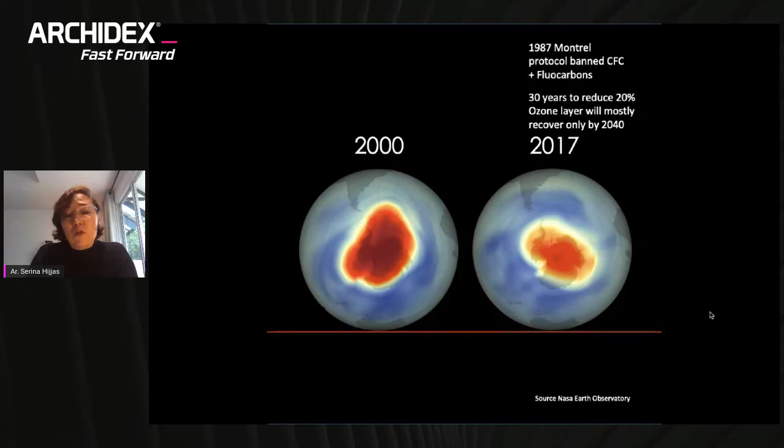I bring this up because whatever actions we take now will not be immediate—it will take years before we can reverse what's happening to climate change and the planet. We are already approaching the 1.5 degree limit, and we'll see repercussions through coastal flooding, urban heat islands, and effects across the planet, including biodiversity depletion, which is already happening. I picked up a book called 'What the F*** is Happening to the Planet,' telling you what's changing, and that really affects how I see we build, create, and innovate moving forward.

I came from a background of architecture, and the buildings done by Hijjas before were predominantly bold, still, iconic, with a strong identity—a lot of black and white. My first job when I returned from studies in the UK was one of my first projects, worked on in collaboration within the office. A lot of our work is really developed collaboratively—while we lead the ideas and direction, the best work comes through collaborative thinking. This was one of my first projects, the Menara Telekom.

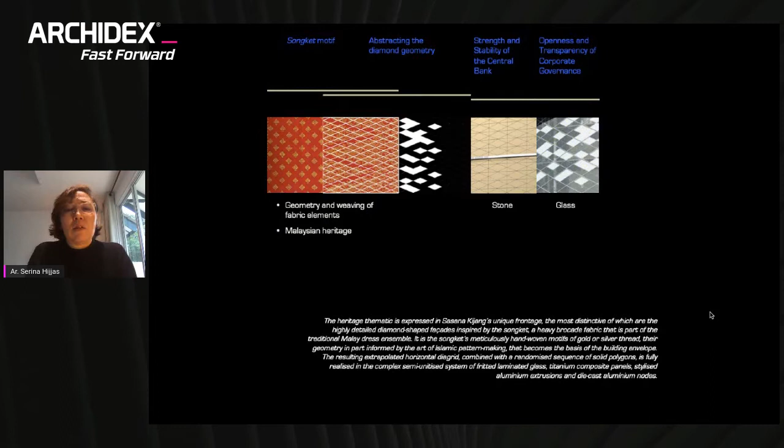The second idea and element inside this building was derived from the heritage of the kain songket, but the songket's geometry and weaving of the fabric was then abstracted into pixelation and diamond geometry, wrapped around the whole building in a series of stone, glass, and even titanium. It's the only building in Malaysia that has titanium on it, on the museum side.

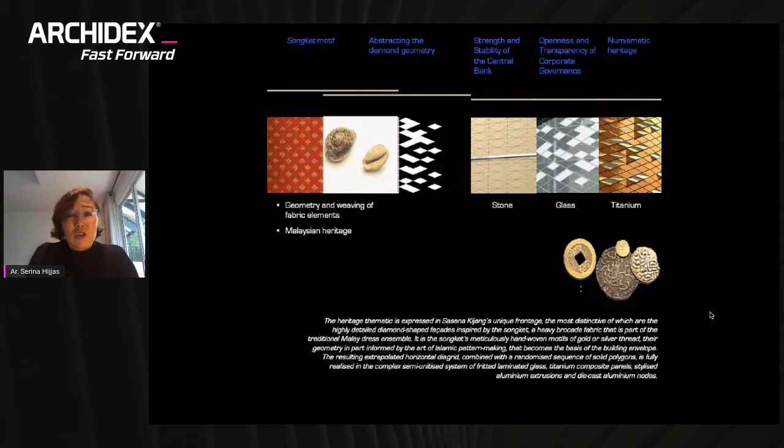This was one of the most complex buildings we have ever built. Not many people know that there's 2 million square feet of built-up building in this building. It's almost two-thirds the height of the Petronas Towers, but done horizontally. It has more than 1,000 car parks submerged underneath the building.

What we wanted to give was a sense of lightness and pavilion. The front buildings are three series of pavilions - Pusaka, Seni, and Pustaka - named because of the function of the buildings inside.

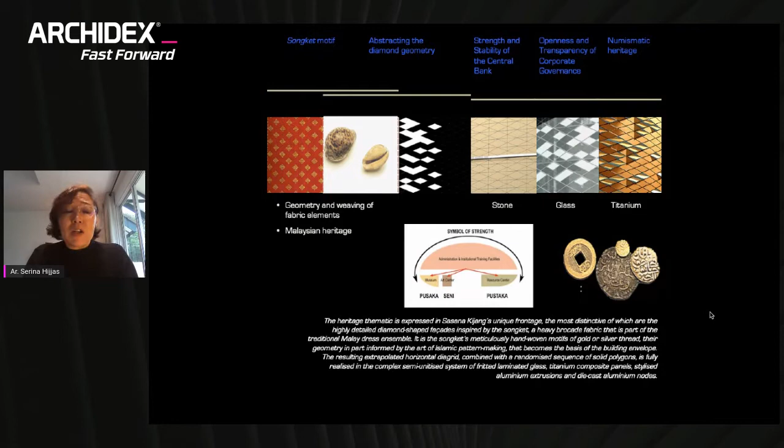This is a view of the building. I've got to say that when I said it was the most complex building, it looks rather simple. But right at the beginning, we looked at the environmental aspects of it and how we brought the daylight into the atrium spaces.

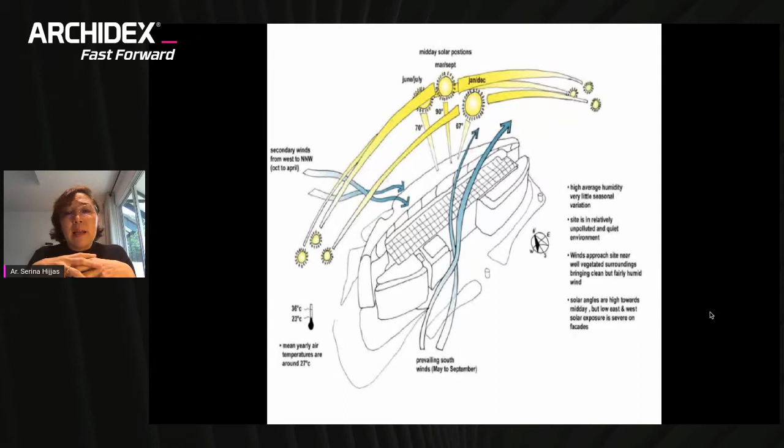We responded to north-south orientation - the building is predominantly north-south, and heat gain is mostly in the east and west. How we wanted to bring light in was also very important.

At the human scale, it wanted to appear very low-rise and approachable. The building, whilst it has different components, responds by wrapping a building fabric that is contiguous around, but the details are quite different.

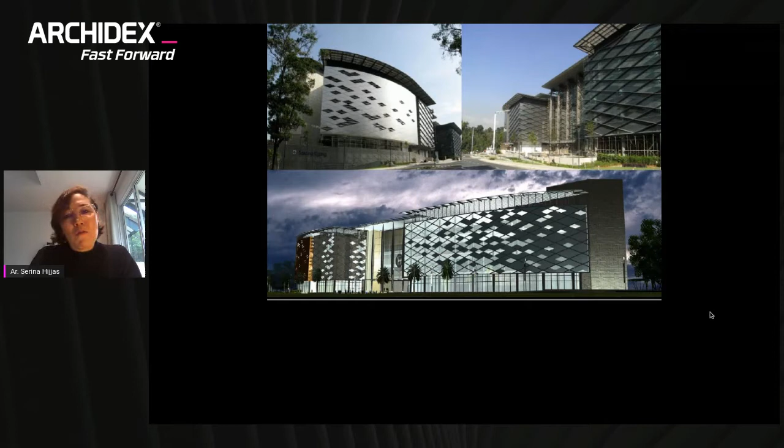There were more than 22 types of facades on this building. As I said, it was one of the most complex buildings that we had done.

From the eyelids - whenever we do a design, I don't know if it's the same for yourselves, but whatever research you do influences the work you do later on. So this diamond facade that you see here appears again in the tower of 4G11 in Putrajaya, and appears again as eyelids on the building.

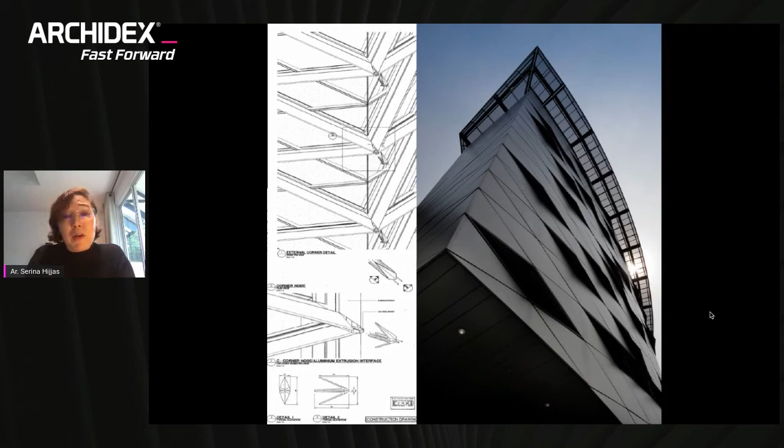The songket also appears in the boulevard of Putrajaya, which was also done by us - this 3-kilometer landscape planning of the boulevard with a matrix of diamond grids going down was also developed from that. It was something we were very fascinated about, and we adopted it into the building, creating something unique but responsive in the facade.

A lot of the times when we start a competition or an idea, we look at it in a very holistic way, and we also work with engineers together - both the MEP and structure simultaneously. We work in a more collaborative way to get the best out of them, and also generate ideas with them.

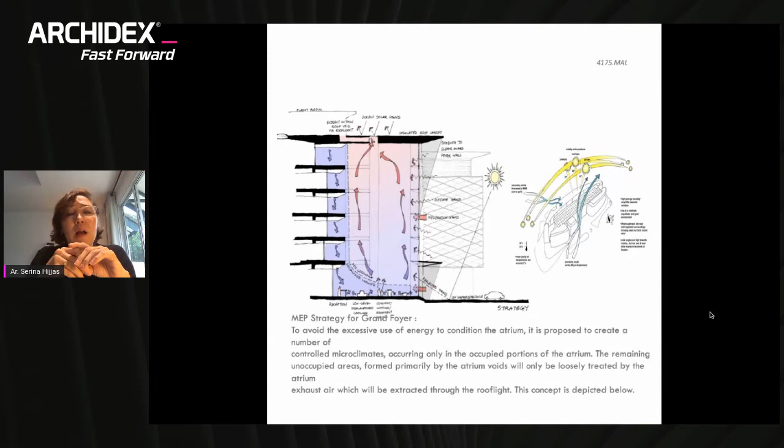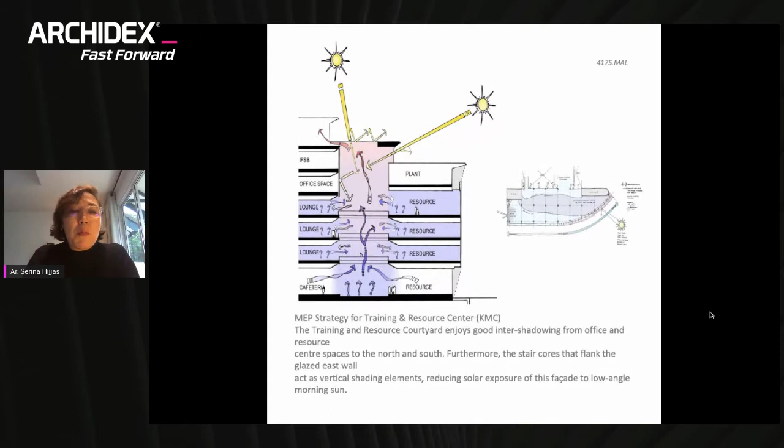So you can see the way the air system works inside this building. As I was mentioning, from the outside you don't understand the layering and the complexity of the building, but there is a whole series of ideas that are generated inside the building.

One of them, of course, was this continuous Nautilus staircase which spirals up the building. It actually starts—we wanted something dynamic, so as you're at the base of the building and you're looking up, the experience of going into the museum, probably comes from a memory of going to the IM Pei building at the Louvre, where there's a huge spiral staircase.

That brings you from ground to lower ground. But in this case, it's a continuous opening up of a spiral that goes up to the top. So it is not a constant spiral—it is a Nautilus staircase, which actually gets bigger and bigger as it goes up to the top.

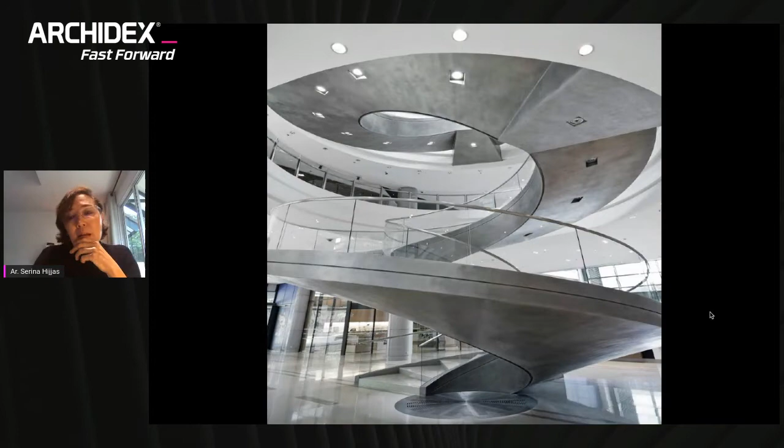So complex as it is, it looks continuous because we use pewter render onto the building, which is basically special, because we wanted it to be Malaysian. That's why you see we've actually used pewter for the first time in this spiral staircase going up.

Another interesting building for us, evoking ideas of portability, was the Malaysian Pavilion. It was the first time that the Malaysian Pavilion at Expo did not represent a Minangkabau roof. So it was a shift, an idea that broke the normal rule, because in all the other expos that Malaysia was represented, it was always this cultural building that looked like a Minangkabau. In this case, we actually explored something completely different.

We wanted to take something that would inspire from nature, and the idea of the portable house. When I was studying at university, the idea of portability is nothing new in the Asian context. A house can be completely built in timber.

For example, we have one house, a 100-year-old house at Serina Hijjas' house in Rimbun Dahan, where the house was built in Perak, then disassembled and moved and reassembled exactly, and it now stands as a 100-year-old house. So portability—we were introducing that idea.

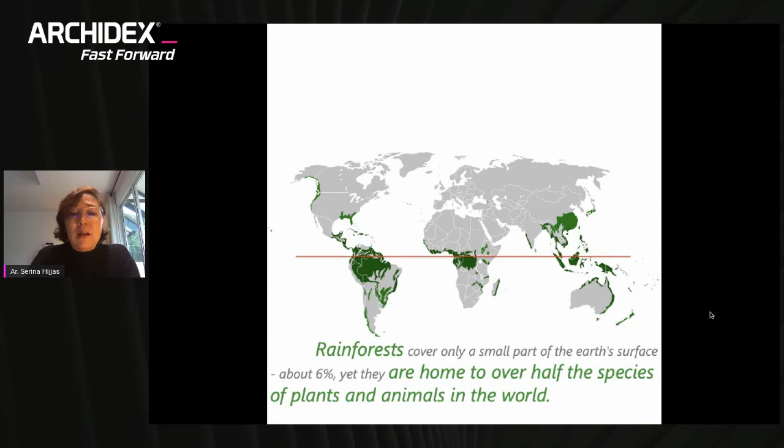So the idea here for the pavilion was the seeds from the rainforest as a metaphor, and they were built using timber. The idea behind this was to exemplify the biodiversity and the uniqueness of Malaysia's biodiversity to the world, both for medicinal value at the humanity level and at the biodiversity level.

So from the humble rainforest seeds, we took this inspiration and translated it into a pavilion, and it's supposed to be an experience, quite different from normal buildings. But at the same time, we looked at the whole sustainability component, from ground source cooling to water collection to the skin of the fabric of the building.

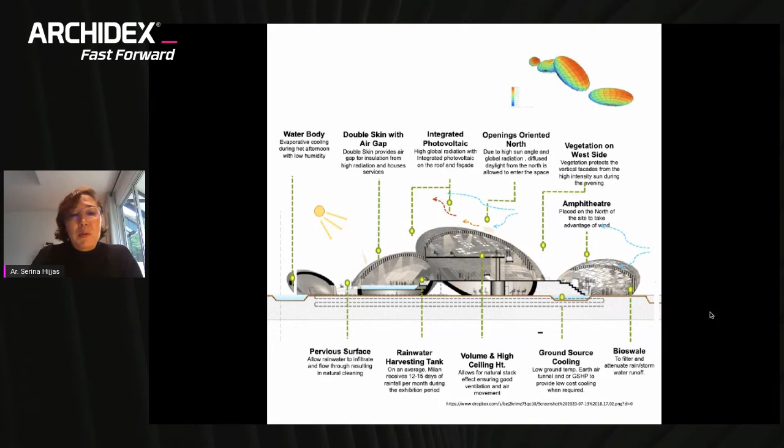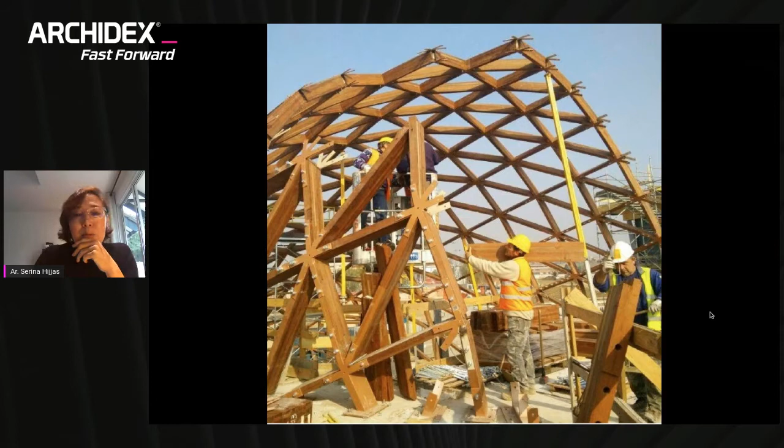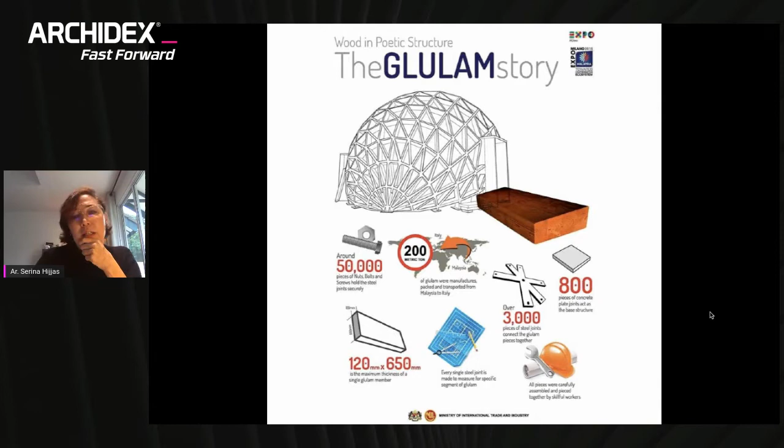It was a very interesting experience, because all of these timbers were manufactured in Johor and then assembled by Italians in Italy. It makes for a very interesting glulam story in terms of building. So I think this was our exploration of trying to showcase the best of Malaysia, both in terms of the richness of their diversity and in terms of the materiality.

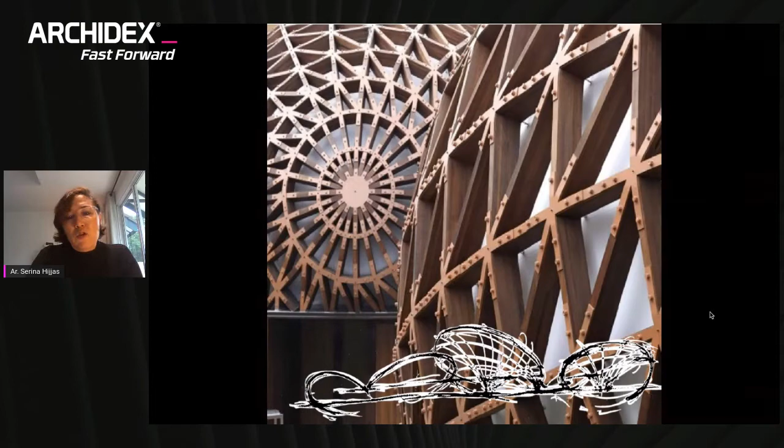And it was one of the best pavilions at Expo. It really became an inspiration to Malaysia itself, that we can show that even though we're a small country, we certainly have a lot of interesting ideas.

Both these pavilions are actually competitions, so we were very fortunate to enter into the second pavilion, the Malaysian pavilion. Pavilions are very interesting for us, because museums and pavilions are the only typologies of buildings that allow you to express something unique. You're not going to get that necessarily with housing or definitely office buildings—there are different types of responses that you would need to take.

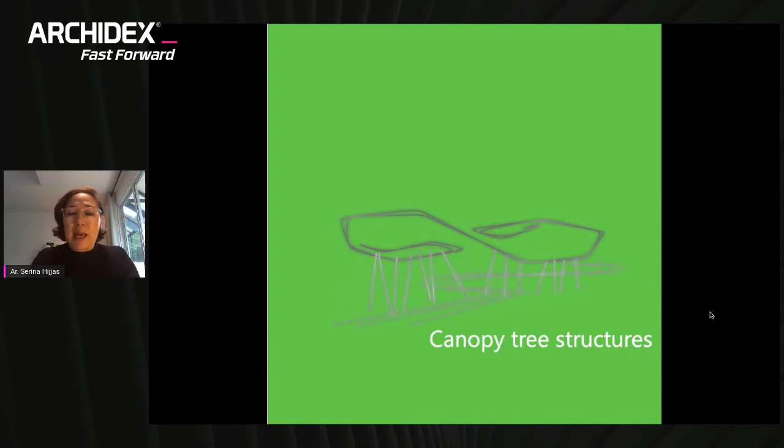In the pavilion for Expo 2020—it's still going to be called Expo 2020, but it's going to be held next year instead because of the global pandemic—we came with a totally different idea in the competition. All that you see here was actually our competition submission right at the beginning, very, very comprehensive, but again, trying to do something that was unique.

In this, we call it In the Canopy of Trees, the concept of creating canopies, tree structures as a Malaysian pavilion.

I remember when I went to Italy and they said, 'Oh, where are you from?' And I said, 'We're from Malaysia.' And they said, 'Oh yeah, we've seen the cartoon animation Sandokan. People live in trees, above the ground on stilts and all the rest.' I said I don't know this animation. It turns out it's an Italian animation about the Malaysian jungle and way of life. So it was very ironic.

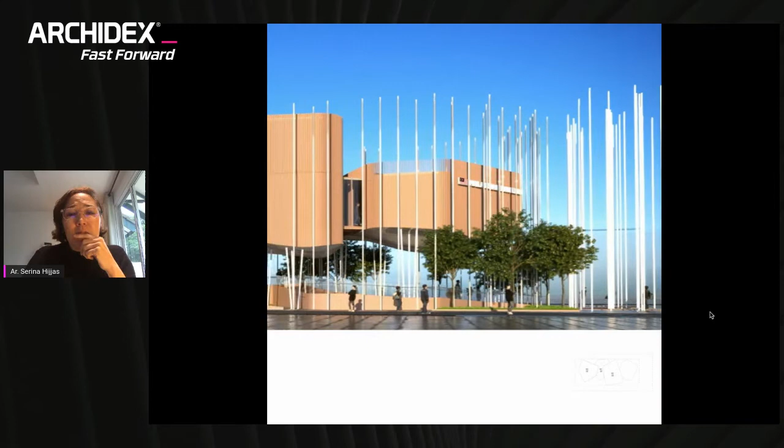That stayed in my mind, that people's perception that we live on stilts. And it's interesting because as we go forward, in the event of climate change, for those living by the water's edge, living on stilts may become the new norm, and we will be reverting back to that. So in this pavilion, the Malaysian building on stilts made of natural materials was one of our inspirations. The experience of meandering through the landscape, unique to Malaysia in terms of our rivers, was an idea that seemed to resonate.

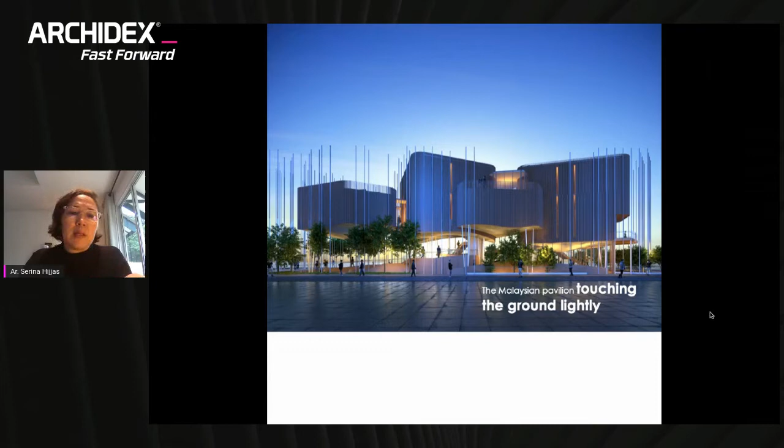And this is the Malaysian Pavilion for Expo 2020. The building is clad and built in steel and timber for sustainability. This will be the first carbon neutral pavilion at Expo, as much as we could do. The idea of the building is touching the ground lightly, so the experience of the groundscape is as important as the experience of the pavilion itself.

We developed this idea because we were getting a lot of criticism globally about palm oil and deforestation. Not many people know that Malaysia does a lot of reforestation and sustainable palm oil. We wanted to showcase that in some form, making a political statement as much as a pavilion statement. So it's an integration—a lot of pavilions are just about an experience inside.

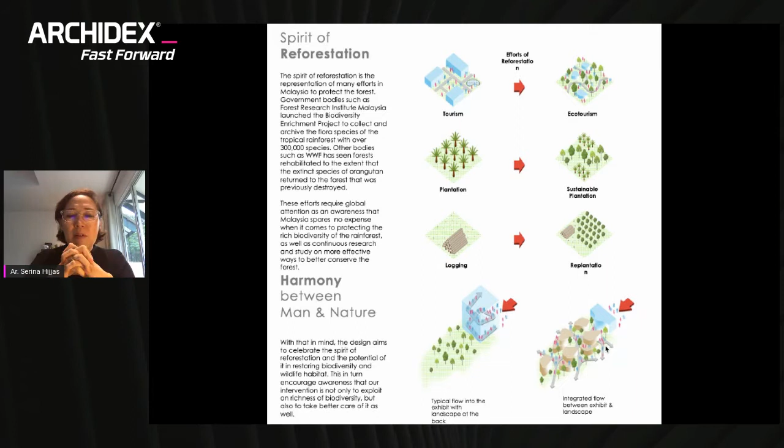Quite interesting, because the Singapore Pavilion, which is obviously going to be our competitor in the tropical belt, is actually lifting off the ground too, but theirs is a single platform pavilion, and the experience of walking up through there is also an experience, and inside it's actually quite green.

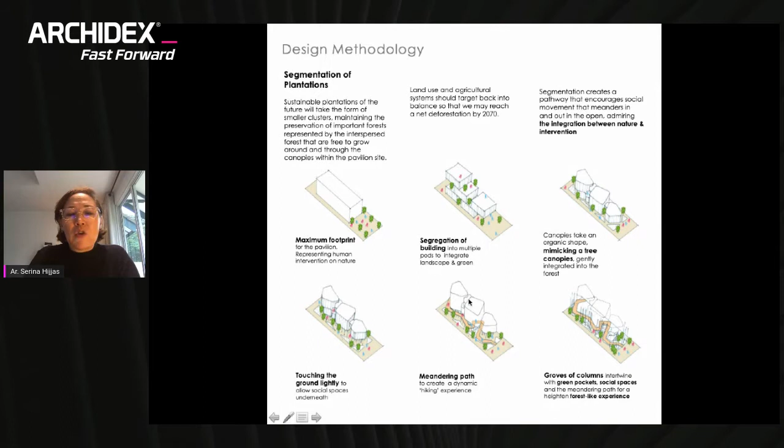So this was some of the design methodology—looking at do we maximize the building on the land, do we stack it up differently, do we mimic the tree canopies, and how do we get the experience of meandering up the building as part of the whole experience of the pavilion? This is a section through the pavilion showing the exhibition itself is above ground.

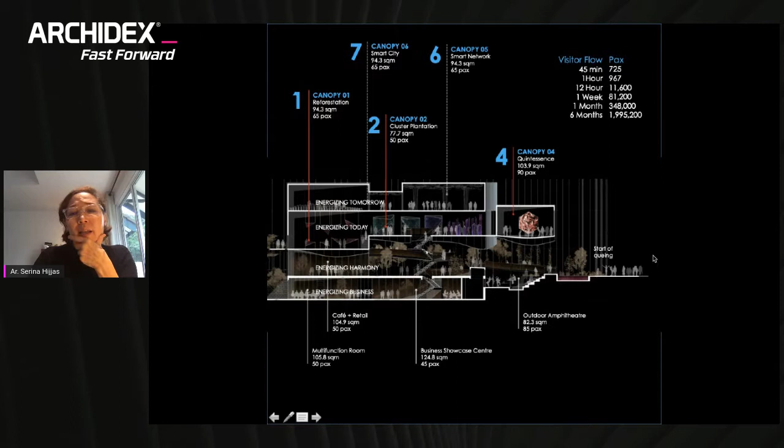But part of the below ground is also an outdoor experience—eating areas, and then the queuing experience and walking up the ramp is part of the entire experience. And then when you come in, what will that experience be?

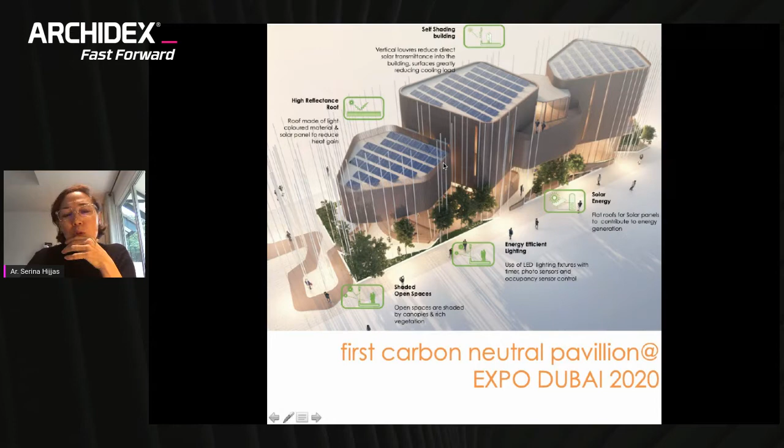As mentioned, it is going to be the first carbon neutral pavilion. We obviously maximize as much as possible on the solar panels, but that only generates about 20% of the energy. So part of doing the first carbon neutral pavilion is that we are going to be growing and reforesting trees in Malaysia as part of the carbon exchange we do, because we're limited on the amount of space we can build. We've maxed out on energy efficiency and solar, and we also have heli fans to scoop air into the place. We've done as much as we could to optimize the building.

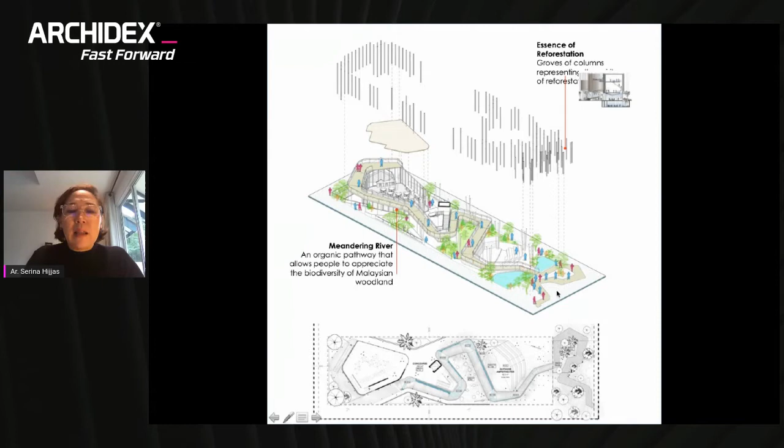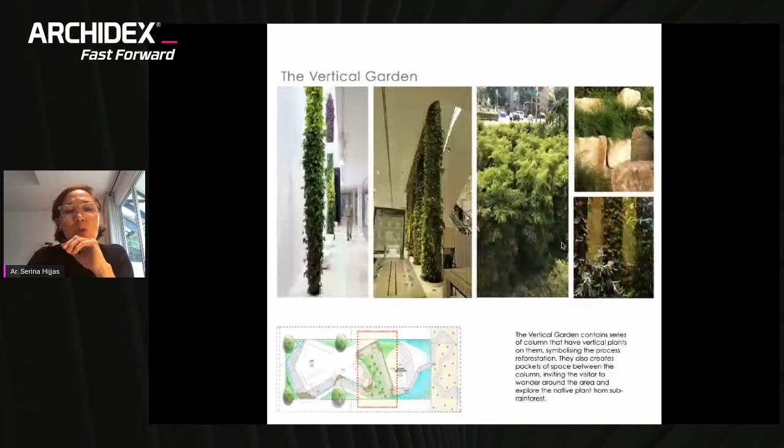This is the experience of people, how they ramp up from the white box experience of the pavilion into the black box experience. And the columns you see around the building—we've also introduced a water rill, so it's the sound of water running down the ramp into a water pool, with a series of vertical greens and courtyard greens to bring light down below.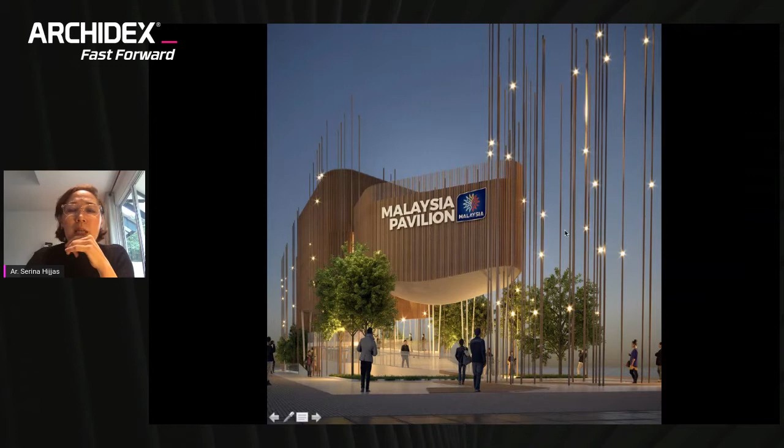So the poles that you see here will actually move a little bit because they rise quite tall, and the lights on it are actually a representation of the fireflies—just a symbolic representation within the pavilion landscape itself.

Not many people realize that daylight is free energy. It's something we enjoy in the tropical belt because we get 360 days of 12 hours of sunshine every day apart from rain. This is quite different if you're living in London or New York, where daylight hours change between 7 to 3 and so on. So we're in a unique place in how to optimize on that, while also realizing what other ideas exist. This building about free energy is the new Celcom Tower.

I don't know if you remember, some of these buildings used to have a Celcom building, the old Celcom building used to say 'Welcome to Celcom territory.' They used Usain Bolt as one of their ads in terms of speed of connectivity, providing speed of connectivity to people. So Usain Bolt's ad came after the building. I've just got to say this.

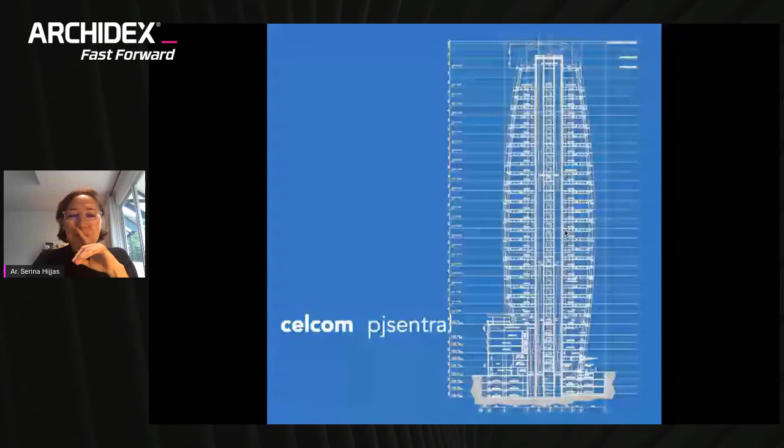This did not inspire the form of the building, but in fact the building is a curved building going up. It's at PJ Sentral. When we developed this building, now some buildings take a long time to complete - Telekom Malaysia, Bank Negara, and this building - they have all taken something like 7 years to complete from start to beginning. So guys, we're in this for the long haul, not for the short haul.

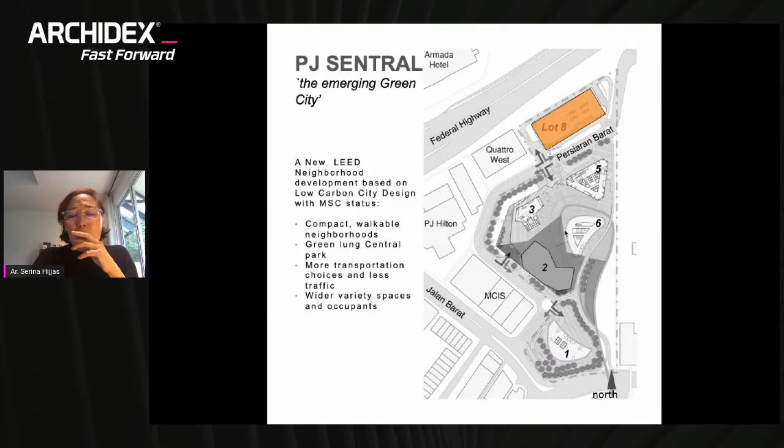But when we were developing the idea for Celcom Tower, this was before the co-working space came in, and we were looking at distributed work options, teleworkers, satellites, move to mobility, change use, where basically they don't work at their desk. So it was an emerging idea, but this is fully taken into this building.

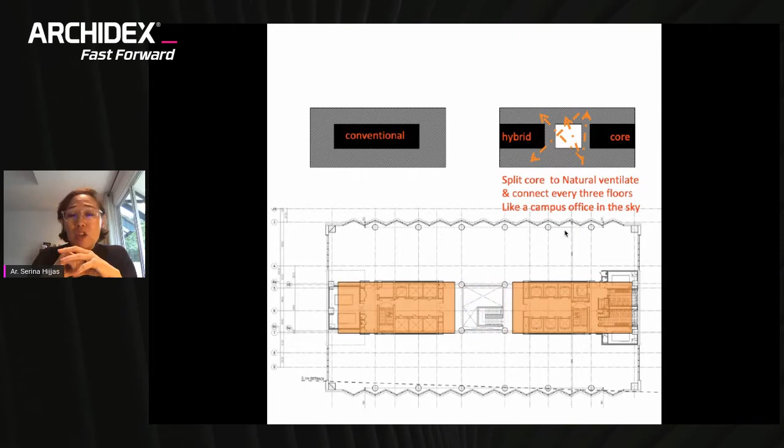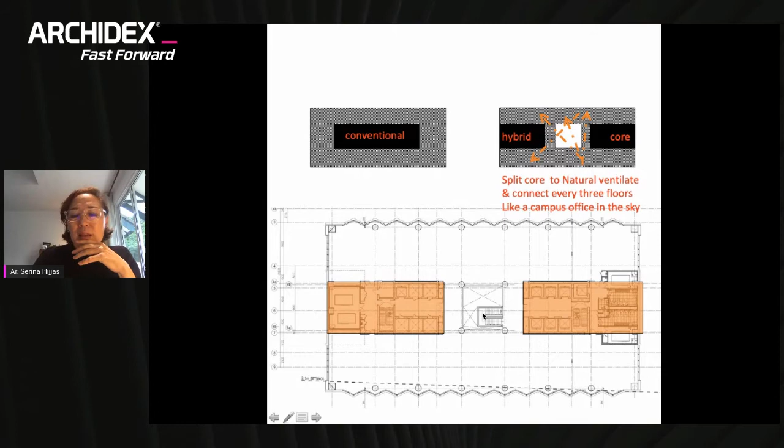The uniqueness of this building is, instead of getting a central core conventionally, we moved the cores to the side. That allows us to ventilate the toilets going up naturally instead of mechanically. It also allowed us, and that was the main idea of the building, to connect the building every 3 floors internally by a mini atria space. So it's, I would say, a kind of hybrid type of core, which was the first.

And originally, the building had all these cross braces going up the building. But as a process of designing the building and working with the developer, some of these things get value-engineered out.

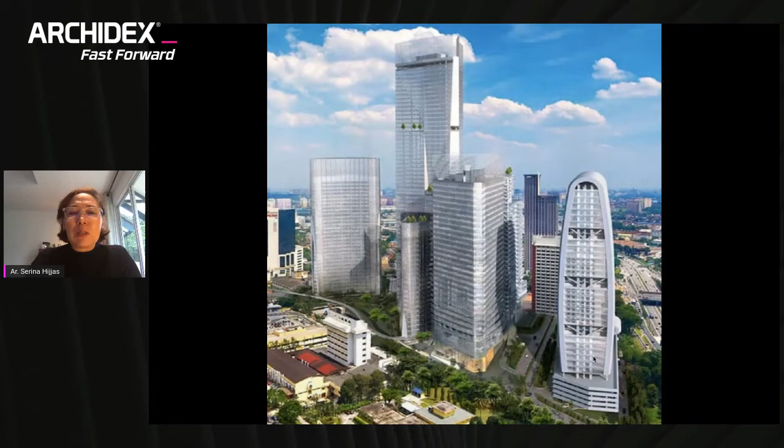And this is the building itself. So whilst it looks like a totally clad glass building, in fact, on the northeast and southwest sides, where you get a lot of heat gain, it's actually predominantly solid where the cores are. So it works in terms of the passive orientation.

When dealing with daylight as a free energy, you have to be careful about glare. In the Malaysian context, we get a lot of glare. So the learning experience here is that when we were designing the building facade, I basically said to the facade engineer that worked with us, when we touch the glass, I don't want to feel the heat of the glass. I want to be able to touch the glass and not feel it's so hot that I can't touch it. So that was one of the ideas for the building.

This is the look of the building. Obviously, Celcom territory, wanted these LEDs at the side so that they could actually do their advertising.

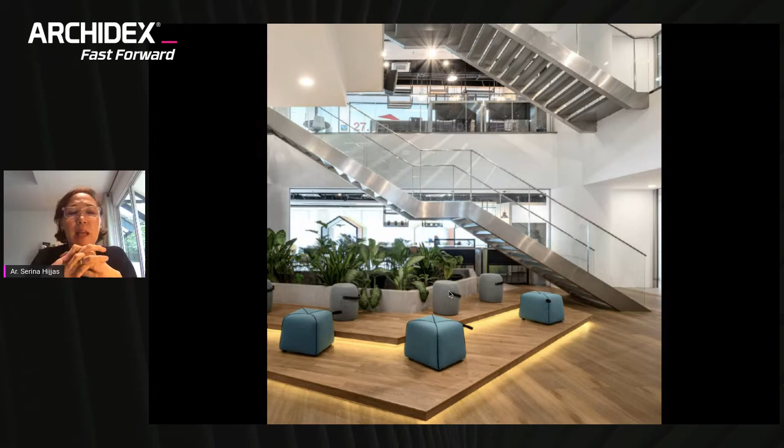This is the 3-story atria spaces that connects between the office spaces. And it is completely table-free in the sense that people can move and work wherever in this space. There is not a fixed desk situation in this building. So it's definitely adopted a very new way of working.

So I'm showing you the section because it's how it's connecting internally as an office building rather than just connected by lifts. It's connected by staircases, so departments can move in and out from one space to the other.

A little bit of a detail - this building performs at half the energy of a typical building, even though it is a glass building.

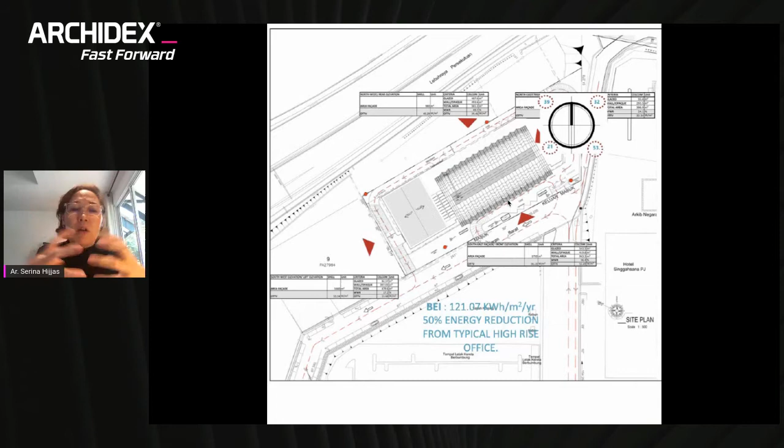And in terms of OTTVs, it's very, very interesting to look at because this is the north and the south. On the southeast, not all facades get the same amount of heat into the space. The OTTV for the glass on this side is actually 53. On this side, which is all glass, is 39. On this side is 32 and 23. So on the sides that are more solid, we're getting a better performance on the OTTV. But you can see that even though it's glass, depending on orientation - and that's why the idea of, if possible, passive orientation of the longitudinal facades to the north and south - will make your building perform a lot better.

This is the building view.

Creating spaces for people horizontally and vertical living has been an idea that we have been studying for some time. How can we change the mindset that we need to live vertically only for low-cost housing to get the density that we need? And how can we create more community livable spaces moving forward and future-proof us?

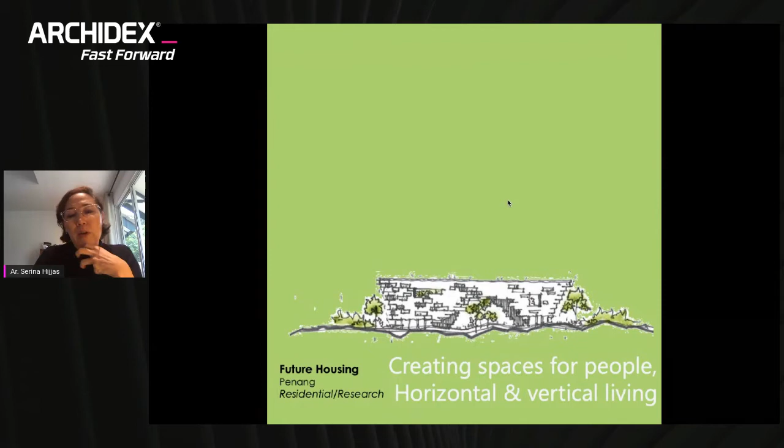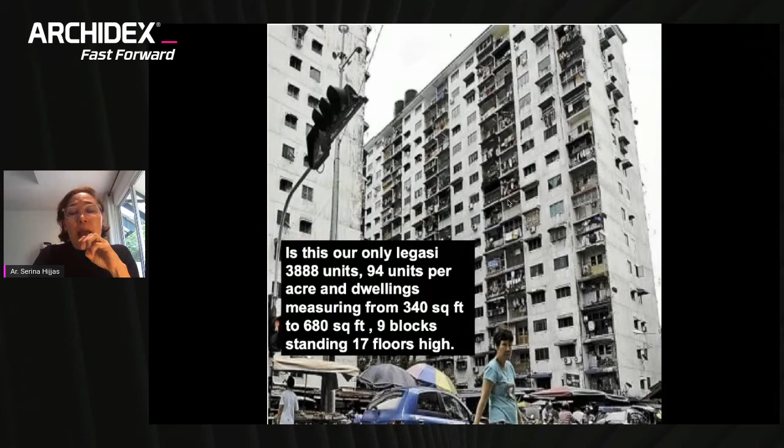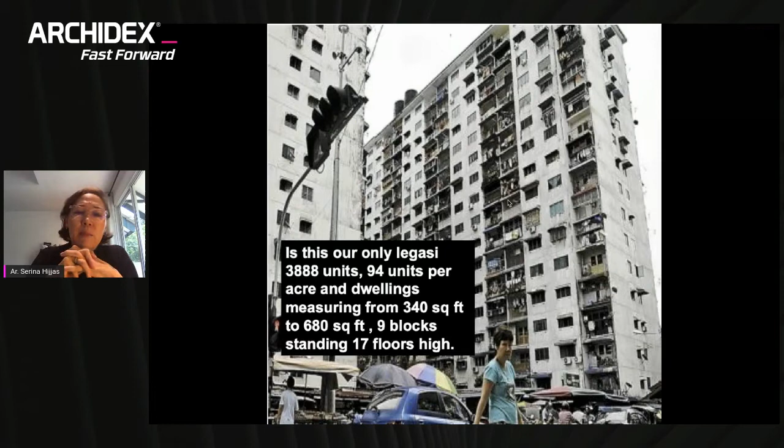And so this is the legacy that we have moving forward. In fact, if you go on the MRT road around Kuala Lumpur, you see a whole series of these huge developed high-rises. And I feel that high-rise for low-cost or medium-cost living isn't the best way forward because they don't have the space and they are not connected to the ground.

But in the time when the Rifle Range towers were going up in Penang, and we used to have the same here called Pekeliling, the normal dwellings were very, very small. We would have something like 3,888 units over 17 floors. And we just have to ask ourselves, is this the future that we want? Or is there more humane livable densification for our cities?

So we made the study for the competition, which I'm sure a lot of you entered, but we didn't enter. We lost time working, doing other jobs, so we did not enter, but we did exhibit this idea.

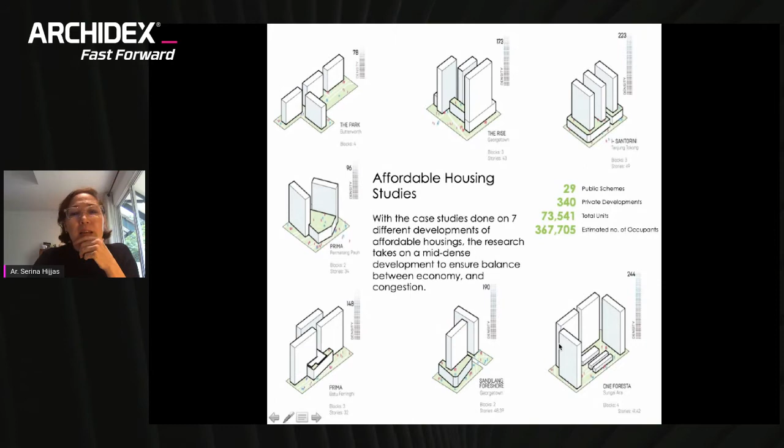And we went around Penang and had a look at the densifications that have moved from 78 units per acre up to 244 units per acre. So in just the last 15 years, we have moved from this to this.

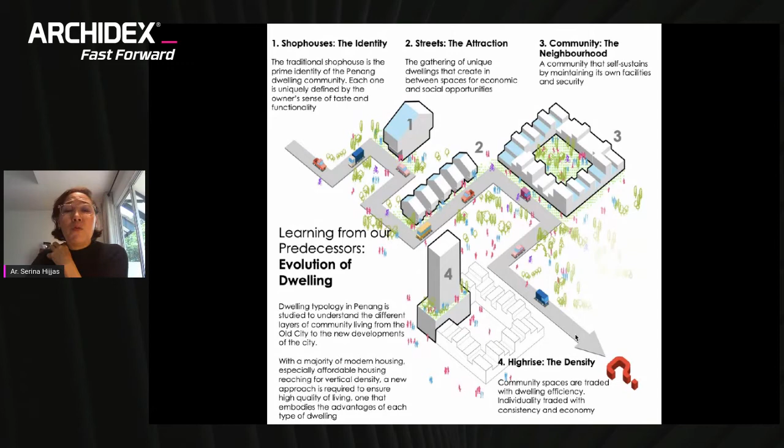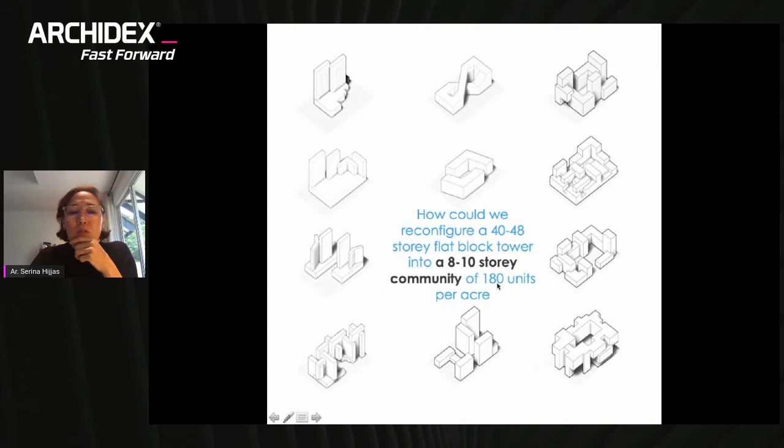And we really wanted to get to an idea of how we can actually move down to a much more neighborhood-level densification. So we explored the idea of 8 to 10-story communities, or 180 units per acre, which is fairly high, but not as high as the 244. And these were our various studies of that.

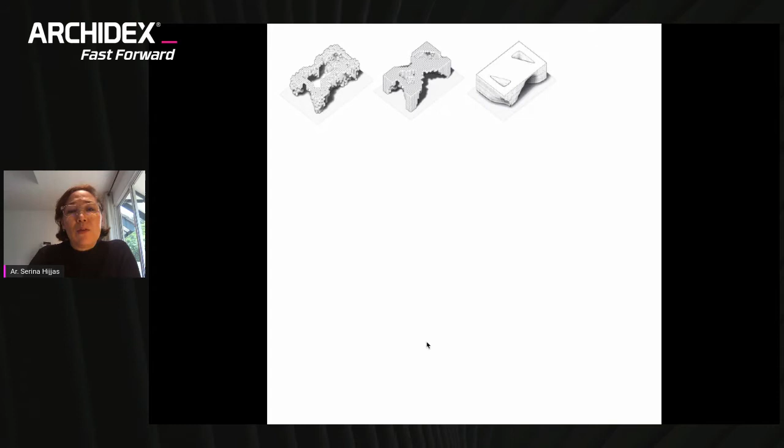Because we need to create a canopy to protect us from the tropical sun, but we could also use it to do planting, for urban agriculture, and also for solar farms on top. So we turned it upside down and developed something more responsive to this environment with a big umbrella canopy roof.

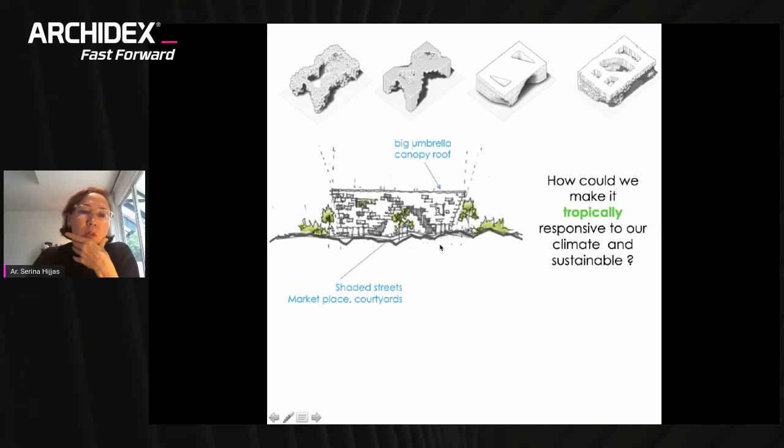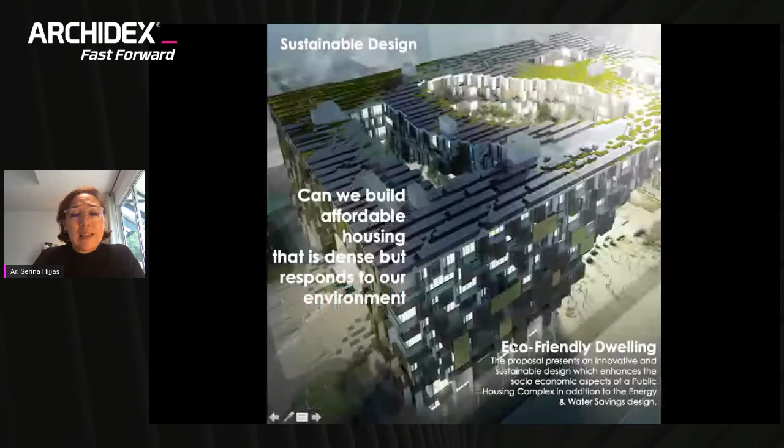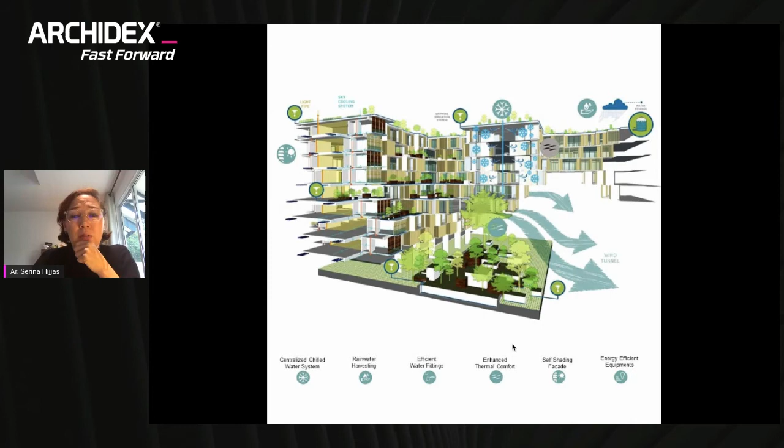And when you angle the facades, you manage to get something at 15 to 25 degrees, and it's self-shading. This was our idea of getting 180 units, but creating something more grounded, and scale-wise, that gave all the enhancements of living in a community.

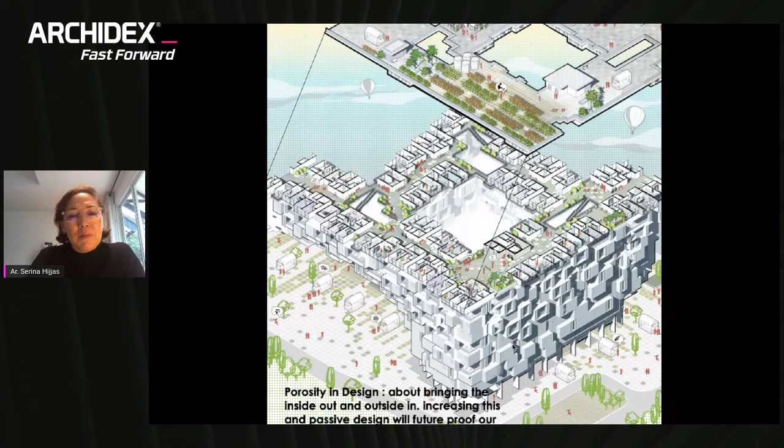Call this porosity in design, because it's bringing the inside out and the outside in, whilst protecting us from rain and sun - a more breathable design, I would say.

The next building is the Courtyard Campus. I don't know if you know our Heriot-Watt building in Putrajaya. It's a large green roof that curves all the way up, and in phase 1 and phase 2 will come down to the ground as the campus capacity grows.

That idea was basically part of greening Putrajaya, or continuing what we call the green continuum, which Putrajaya, being one of the greenest cities in Malaysia, that's what we wanted to express. Coming from that experience...

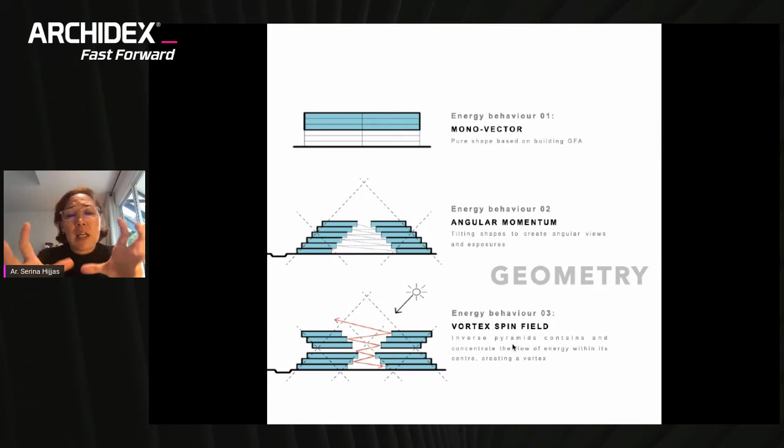And the way the garden works inside is like creating a series of gardens that are like a vortex spinning inside that space. So the building has research labs at the bottom and teaching labs at the top. It has a central garden that goes inside the building, so it's actually quite unique in that way. That garden is like a green vortex inside that space.

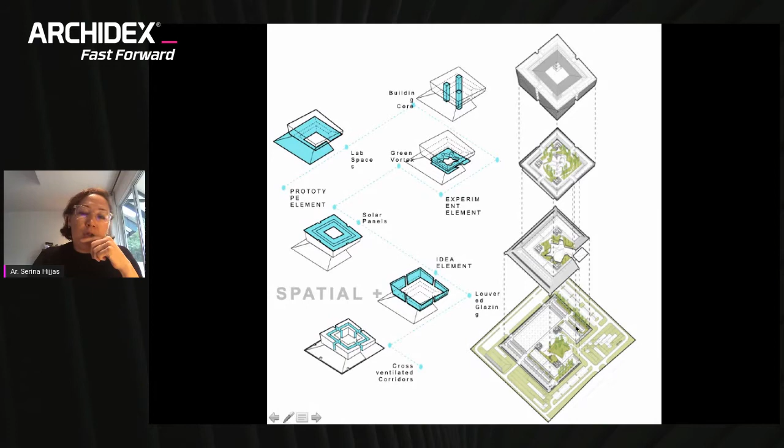That's the roof view of it. That's an image of what that courtyard will be like, and the series of labs that go around.

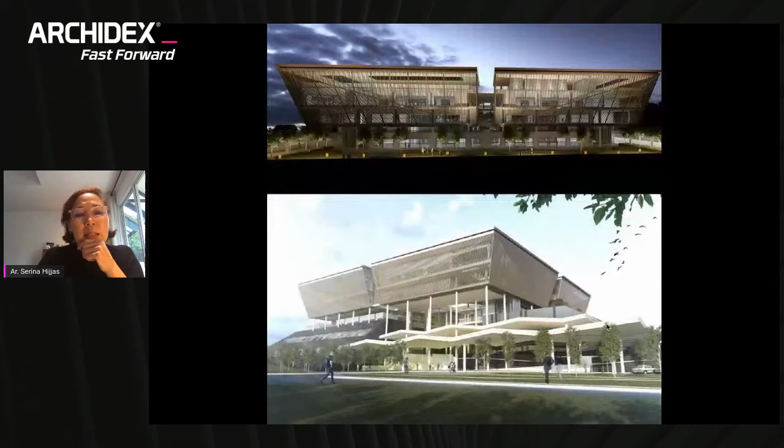It's a very interesting building, and I would say it's probably inspired slightly by the COE building, Waste to Energy Research Center - that training center, small building we've done in Seremban. But this is on a larger scale. So I think it's going to be quite an interesting building.

Obviously, the building facade fabric is shading the inside teaching spaces, creating a sort of lattice skin around the building.

Most of us, and I think you too moving forward, will probably be looking more and more into competitions. Most of our projects are won through competitions. It's not necessarily through like the last one we're going to show you later on. A lot of architectural work is actually through competitions, and it's interesting for us because competitions give us the opportunity to do research, and that research informs us later in the design of the buildings we do. In this one, we sometimes do an international competition.

We did a library in Dubai where we came second place. In Kazakhstan, we came second place for the Kazakhstan president's building, and third place for a mosque in Kazakhstan. So it's not necessary that we're going to make number one, but it is a lot of work.

It is definitely very interesting. This one in India was a museum by the very important India Gate in Delhi, a war memorial museum. We were selected as one of 7 out of 160 to present in India.

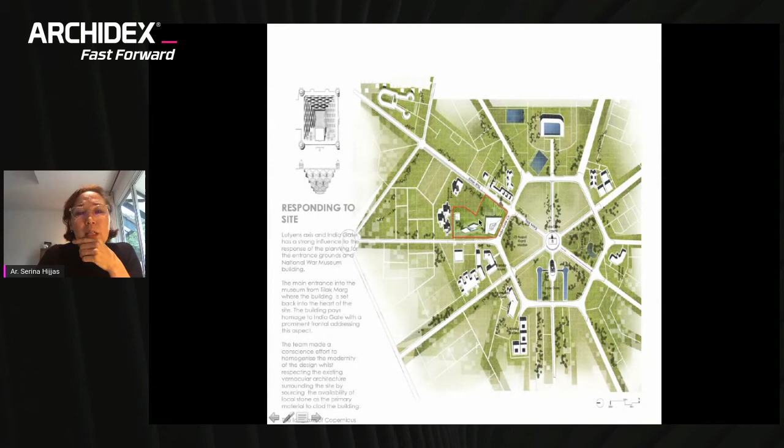This war museum was more about building underground than above ground. We wanted to maintain all the greenscape and the old trees here, and create the experience of the museum underground. This is the entrance building, and the basis of this idea was based on the Chakravyuha formation.

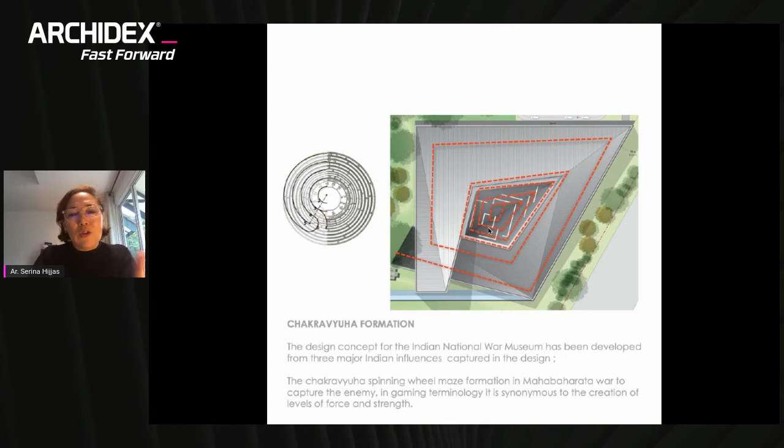If you know what the chakra is, it's actually a maze formation used in traditional wartime to capture the enemy. We thought that was a very unique idea to bring into this building, but instead of being a circle chakra, it's a different form chakra.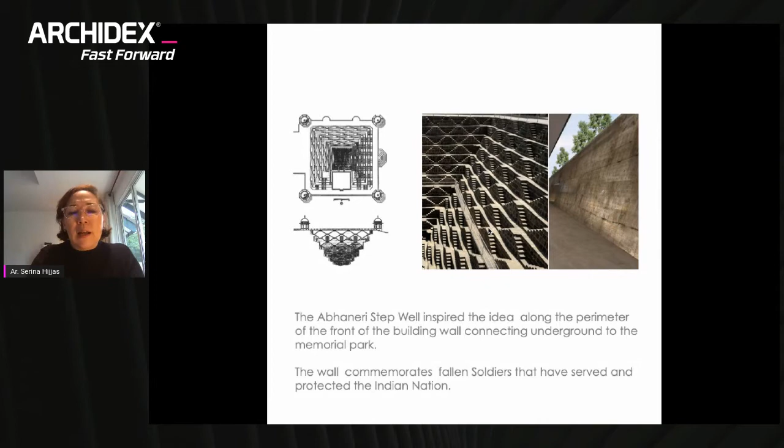In India, there is this very famous Abhaneri step well, which is an underground step well that collects water, but is also a palace. Building underground, we thought that was a very nice analogy for creating the space underneath.

So some of these were the concept diagrams before we started the building. You can see we completely, for the competition, did the solar studies and the environmental impact of this building and what we could do.

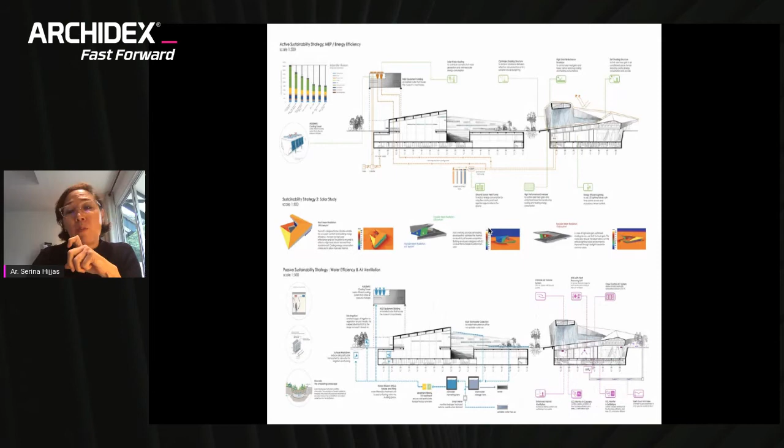In this case, we're using ground cooling because in that climate we can actually get some use of ground cooling, which is more effective than in a tropical environment. So you have to respond both to the culture and the environment when designing a building there.

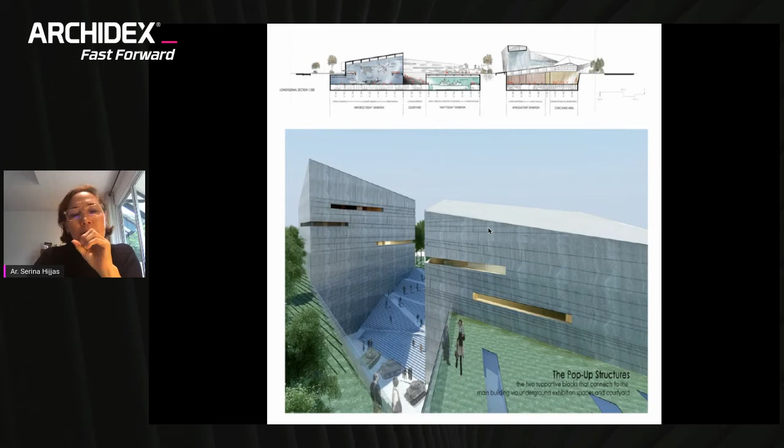These were the pop-up structures that basically look like, in war, bunkers built to protect soldiers, with only slits to look out. This was brought into some of the pop-up buildings that emerged.

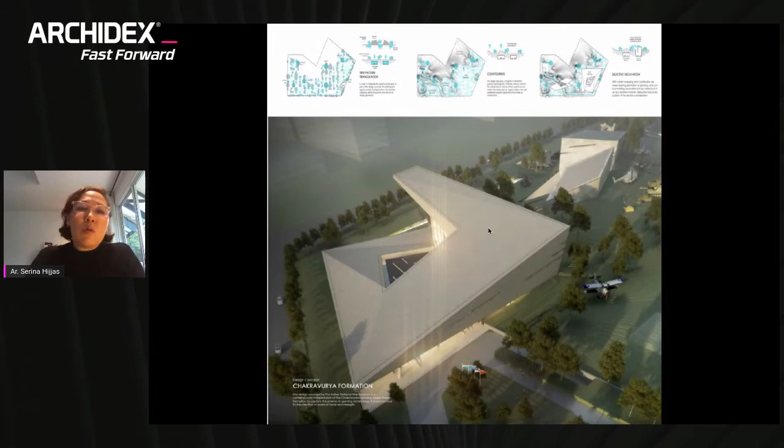Unfortunately, we didn't win, and it was won by an Indian architect. But they've not moved forward and built this.

So lastly, Adriata said I should actually present to you BiodiverCity. So what were we doing in lockdown? We were developing BiodiverCity for Penang South Islands during the full MCO and RMCO.

We were working from Kuala Lumpur in collaboration with BIG in New York, Denmark, and London, so the time zone was crazy. We'd be working till midnight our time while they worked till 3 a.m. their time, just to develop this. I've got to say, it is one of the best collaborations we've ever done. Working with BIG, we thought would be very daunting, but in fact it was a full collaboration experience, and for us it was quite unique.

I know there's a lot of comments about the idea of BiodiverCity. The approach we took has another series of layers to it: an event to celebrate the biodiversity we have in Malaysia, and at another level, to create a net positive master plan for the new islands.

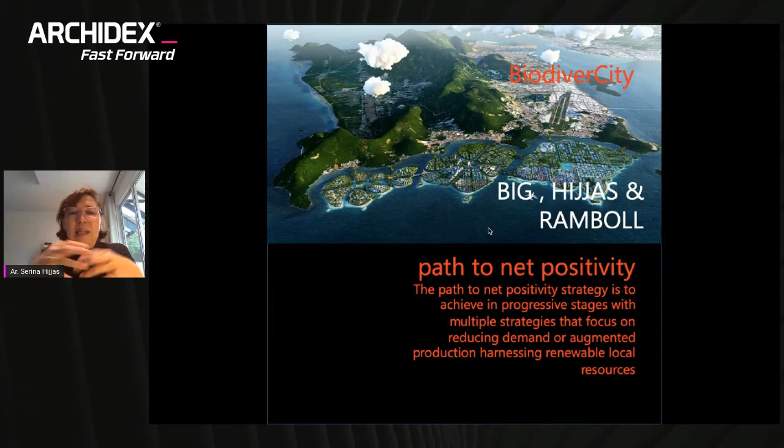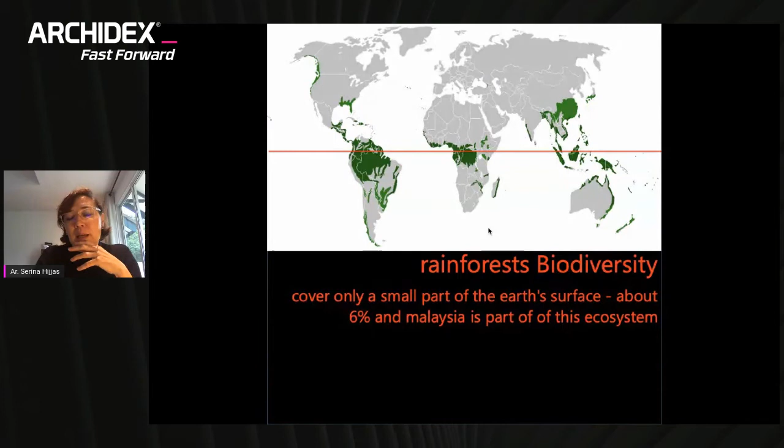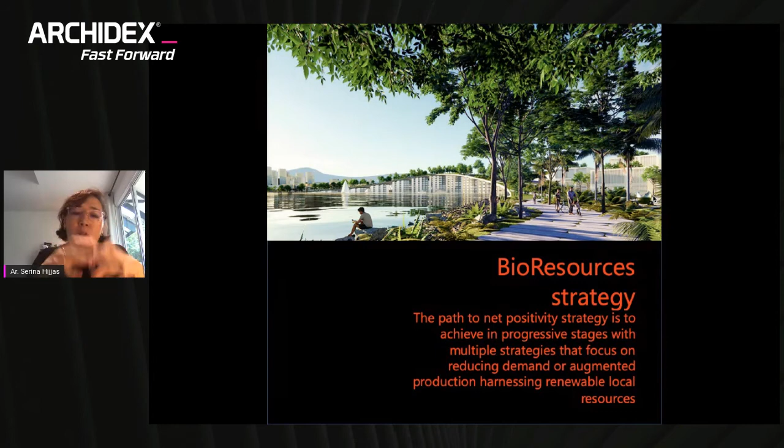And then looking at bioresources strategy in terms of how we will build and how our mobility works. So the entire concept is biomobility, bioresources, biofinancials. That was the total approach we took for this master plan, and the importance of ecological networks.

So I come back to finishing with life on Earth and possible life on Mars. I don't see the fascination for life on Mars, though I appreciated the competition last year on Life on Mars, which was won by one of the guys who works at Hijjas. But more than anything, this painting, which I've heard has appeared on other people's presentations, tells me a lot about what we are missing out on. This is a painting by Ibrahim Hussein, which I knew as a child. I was given one of his paintings — he was a very funny, dynamic painter, and one of the best Malaysian painters. He painted this just one year after the first man landed on the moon.